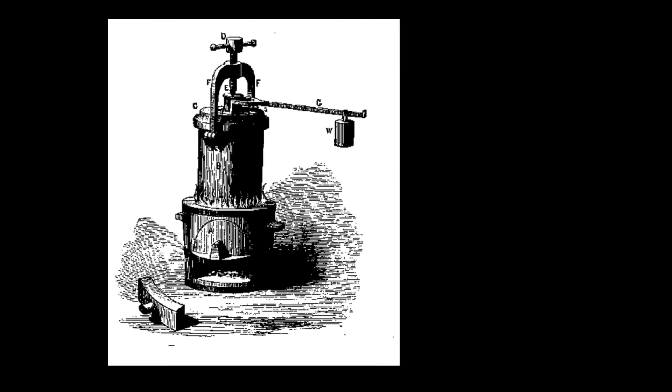Papin had already invented an early pressure cooker, proving that steam could build tremendous pressure inside a sealed container. He believed that this pressure might someday move machines. Although Papin never built a practical steam engine, his experiments inspired many other inventors. Then another English engineer stepped forward.

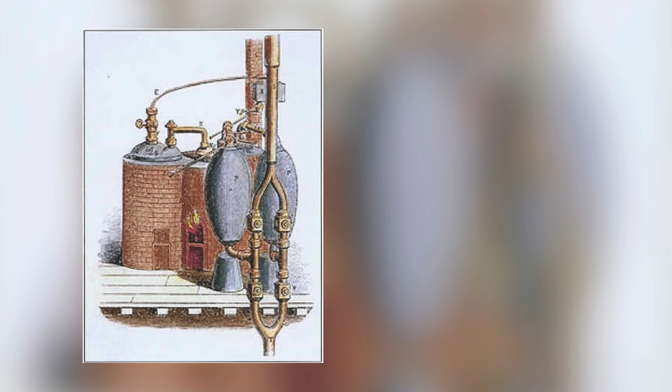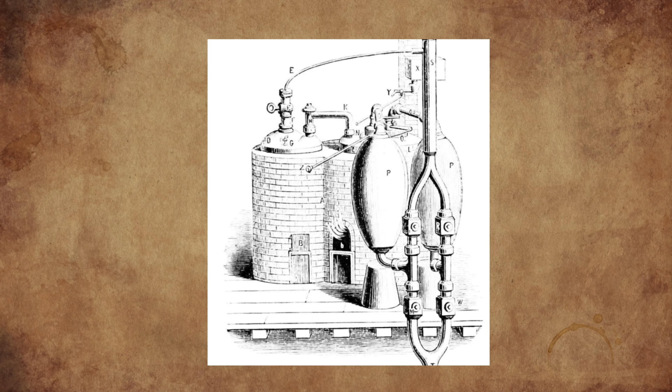He is Thomas Savery. In 1698, Savery patented a machine designed specifically to pump water out of flooded mines. His invention worked without pistons or moving cylinders. Steam filled a sealed chamber, forcing water upward. Then cold water cooled the chamber, creating a vacuum that pulled more water inside. Repeating this cycle slowly lifted water from underground.

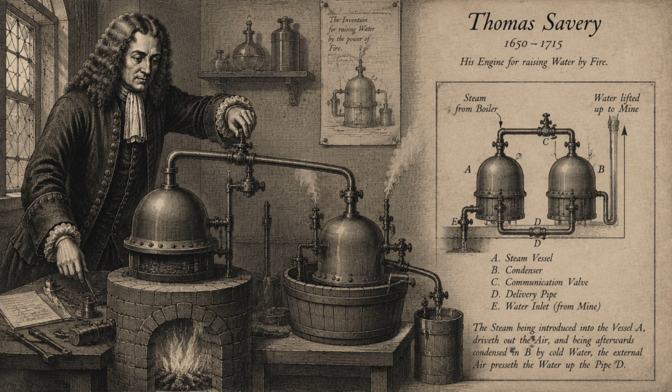It was an ingenious idea, but it had serious problems. The engine could only lift water from relatively shallow depths. High steam pressure often caused dangerous failures, and the machine consumed enormous amounts of fuel. Mine owners soon realized it wasn't the perfect answer. Still, Savery had proven something extraordinary. Steam could perform useful work. That single achievement changed the direction of engineering forever.

Soon, another inventor saw how the design could be improved. His name was Thomas Newcomen. Instead of relying only on steam pressure, Newcomen introduced a moving piston inside a large cylinder. Steam filled the cylinder, then cold water was sprayed inside. As the steam suddenly condensed into water, it created a powerful vacuum. Atmospheric pressure pushed the piston downward with tremendous force.

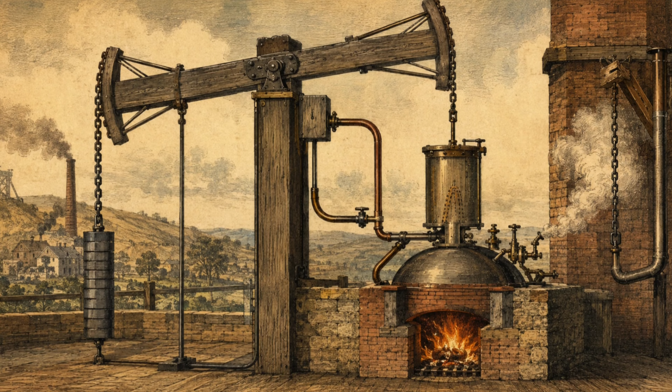That motion operated giant wooden beams connected to mine pumps, removing water much more efficiently than ever before. In 1712, Newcomen completed the first practical atmospheric steam engine. For the first time in history, a machine could continuously perform heavy industrial work without relying on animals, wind, or flowing rivers.

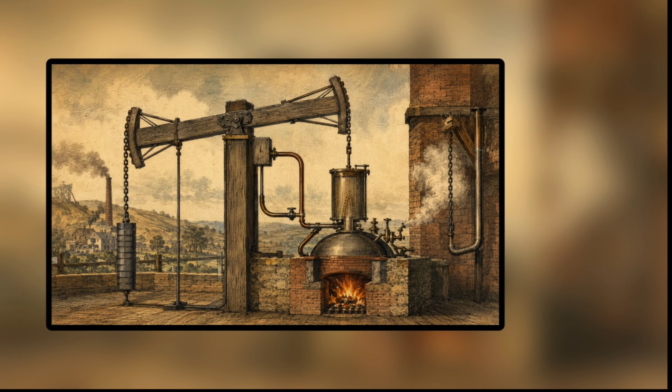Across Britain, mining companies rushed to install Newcomen engines. Hundreds of them began pumping water from deep underground. Coal production increased dramatically. But despite this success, there was still one enormous problem. Every single stroke of the engine wasted huge amounts of energy.

The cylinder was heated by steam, then immediately cooled with cold water, only to be heated again seconds later. This constant heating and cooling consumed incredible amounts of coal. The steam engine worked, but it was painfully inefficient. And that inefficiency would soon inspire one young engineer to create a machine that would transform the entire world forever.

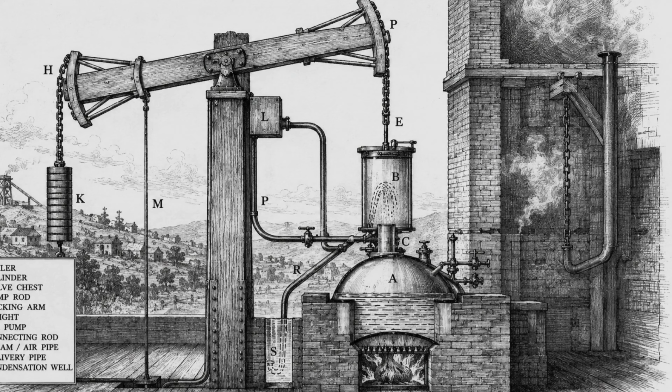The young engineer who would change history wasn't trying to invent a new machine. He was simply repairing an old one. His name was James Watt. In 1763, the University of Glasgow asked Watt to repair a small model of a Newcomen steam engine used for teaching students. As he examined the machine, he noticed something that others had accepted for decades.

The engine wasn't weak because steam lacked power. It was weak because it wasted heat. Every cycle, the cylinder became hot from steam, then was cooled with cold water to create a vacuum. Moments later, it had to be heated all over again. Most of the energy from burning coal disappeared just reheating the metal cylinder.

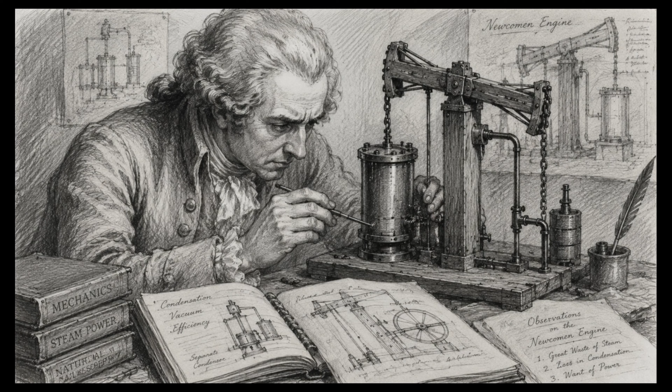Watt believed there had to be a better way. For months, he studied the problem. Then, during a walk on a Sunday afternoon, the solution came to him. What if the steam could be cooled somewhere else?

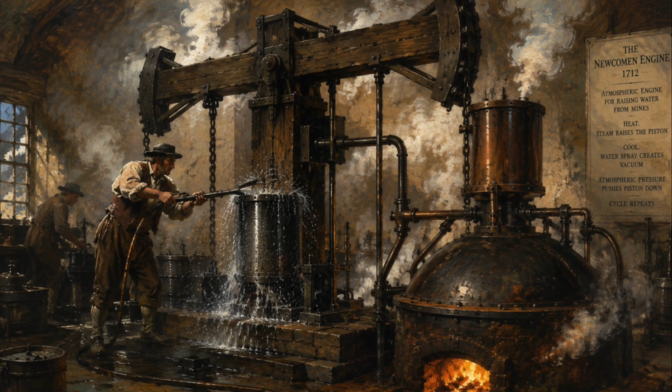Instead of cooling the main cylinder after every stroke, Watt designed a separate chamber where steam could condense into water. The main cylinder would remain hot all the time, while only the separate chamber became cold. It sounded like a small change. In reality, it was one of the greatest engineering breakthroughs in history.

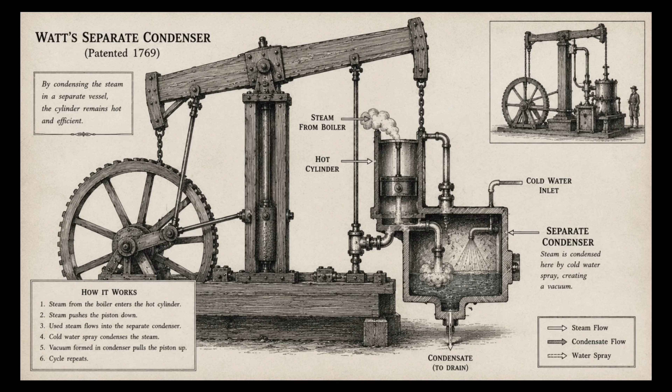When Watt built his improved engine, it used far less coal than the Newcomen engine, while producing the same amount of work. For mine owners, factories, and businesses, that meant enormous savings. But Watt faced another problem. Building steam engines required money.

Fortunately, he met a wealthy businessman named Matthew Boulton, owner of the Soho Manufactory in Birmingham. Boulton immediately understood the importance of Watt's invention. The two formed a partnership that would become one of the most successful collaborations in industrial history. Together, they improved the engine even further.

Watt added better seals to reduce steam leaks. He designed mechanisms that converted the up and down movement of the piston into smooth rotary motion. That single improvement changed everything. Earlier steam engines mainly pumped water. Now, steam engines could turn wheels. Factories no longer needed to be built beside rivers. Machines could operate anywhere coal was available.

Textile mills, flour mills, ironworks, and workshops suddenly had a powerful new source of energy. For the first time, production was no longer limited by nature. Steam power was beginning to reshape society itself. As demand grew, Boulton and Watt installed engines across Britain. Every new machine increased productivity.

Factories became larger. Manufacturing became faster. Cities expanded around industrial centers. Historians would later call this period the Industrial Revolution. But the story of the steam engine was still far from over. The next generation of engineers would take steam power beyond factories and put it on wheels and ships, changing transportation forever.

By the early 1800s, steam engines had transformed mines and factories, but they were still enormous machines. Most of them were fixed to the ground, powering equipment through giant beams, gears, and rotating shafts. Few people believed they could ever move themselves. One engineer refused to accept that limitation. His name was Richard Trevithick.

Unlike James Watt, Trevithick believed steam engines could operate with much higher pressure. Higher pressure steam meant smaller cylinders, lighter engines, and much greater power. Many people thought it was too dangerous. Boilers had exploded before, and high-pressure steam had a frightening reputation.

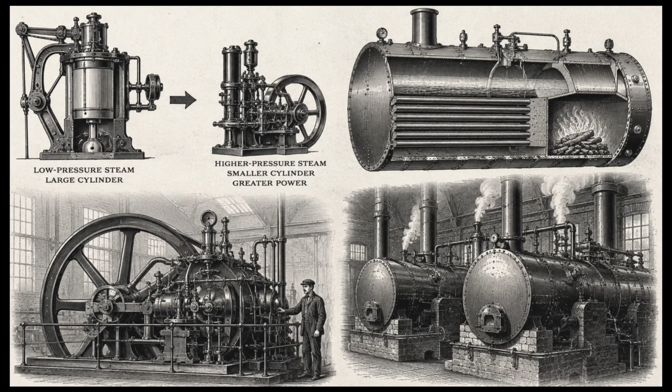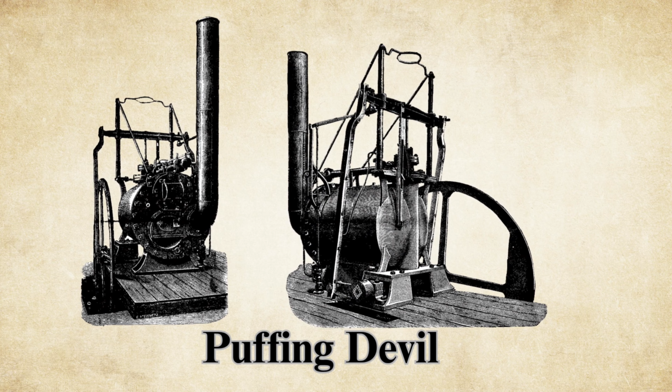But Trevithick continued experimenting. In 1801, he built one of the world's first full-sized, steam-powered road vehicles. Nicknamed the Puffing Devil, it carried passengers under its own power. Although the machine was unreliable and eventually caught fire after being left unattended, it proved something extraordinary. A steam engine could move itself.

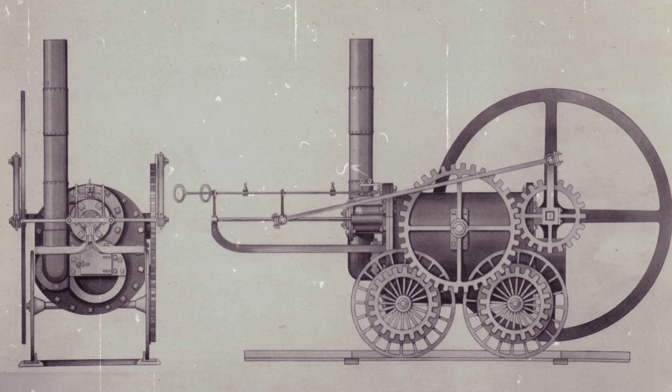3 years later, Trevithick achieved another historic milestone. In 1804, his steam locomotive pulled loaded wagons along iron rails in South Wales. For the first time in history, a steam-powered locomotive carried heavy cargo on a railway. The journey wasn't perfect. The engine was so heavy that it damaged some of the rails. Even so, the demonstration showed that rail transport had a remarkable future.

Then came another engineer whose name became almost synonymous with railways, George Stephenson. Stephenson spent years improving locomotive design. He made engines more reliable, more efficient, and strong enough for everyday use. In 1825, the Stockton and Darlington Railway opened in England. Stephenson's locomotive hauled both coal and passengers, becoming the world's first public railway to use steam locomotives successfully.

Just 5 years later, another breakthrough arrived. In 1830, the Liverpool and Manchester Railway connected two major cities using regular steam-powered trains. People could now travel faster than ever before. Goods that once took days to transport could arrive within hours. Railways spread rapidly across Britain. Then they spread across Europe. Soon they reached North America, India, Australia, and many other parts of the world.

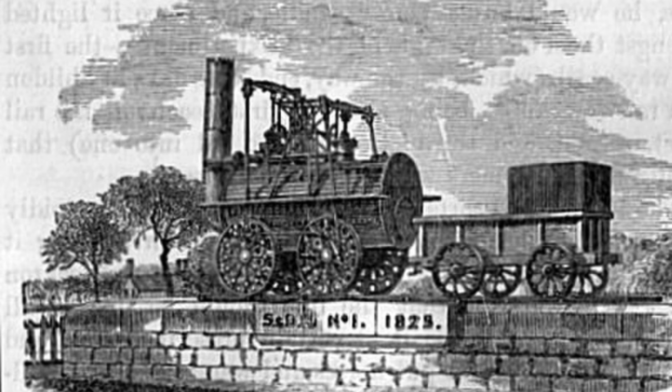Steam didn't stop on land. Engineers also began fitting steam engines into ships. Unlike sailing ships, steamships no longer depended entirely on the wind. They could travel on schedule, navigate rivers more easily, and cross oceans with greater reliability. Global trade accelerated. Travel became faster. The world suddenly felt much smaller.

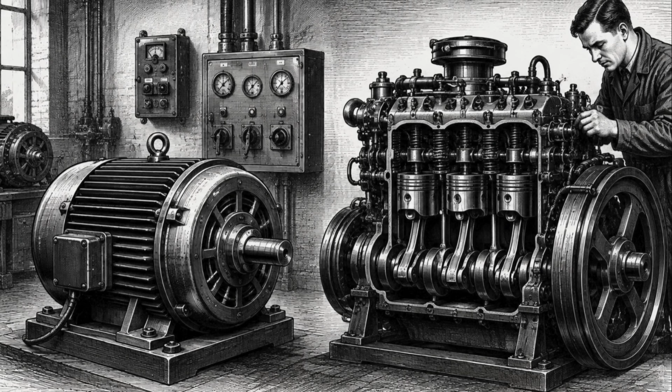Within a few decades, steam engines had powered factories, transformed transportation, expanded international trade, and connected distant cities in ways previous generations could never have imagined. What had begun as a simple observation of boiling water had become the driving force behind the modern world. But by the late 19th century, another technology was beginning to emerge. Electric motors and internal combustion engines were quieter, cleaner, and often more efficient. Slowly, steam began to lose its dominance.

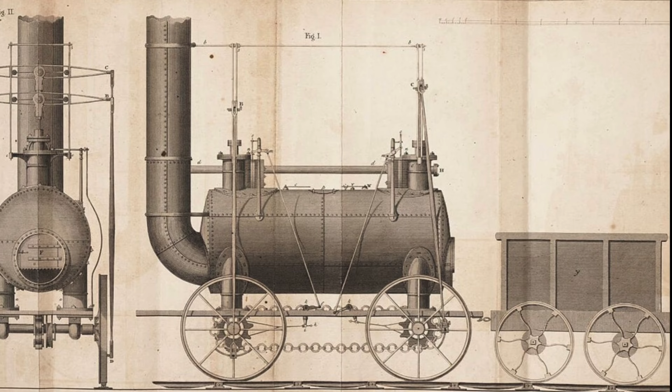Yet its legacy remains everywhere. Without the steam engine, there would have been no industrial revolution on the scale the world experienced. Modern factories, railways, global trade, and many of the technologies we rely on today were built on the foundation laid by those early steam pioneers. The steam engine wasn't just another invention. It was the machine that gave humanity the power to transform civilization.